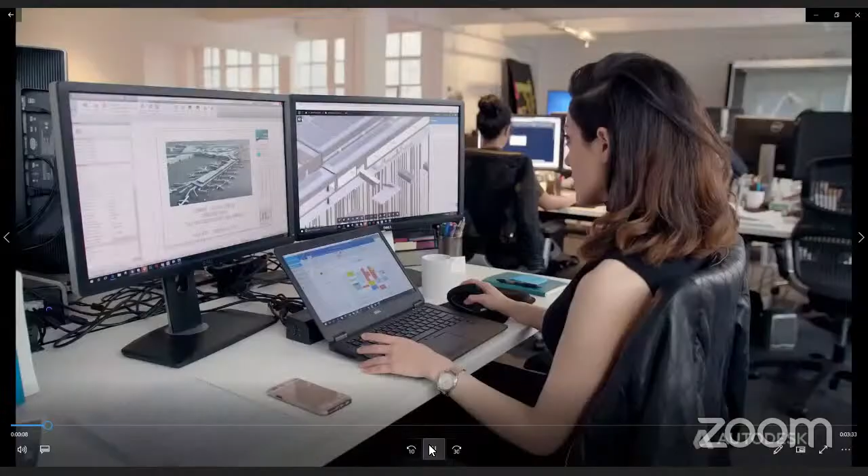Every AEC project begins with an idea and a multidisciplinary team working with a collection of tools to bring that idea to life.

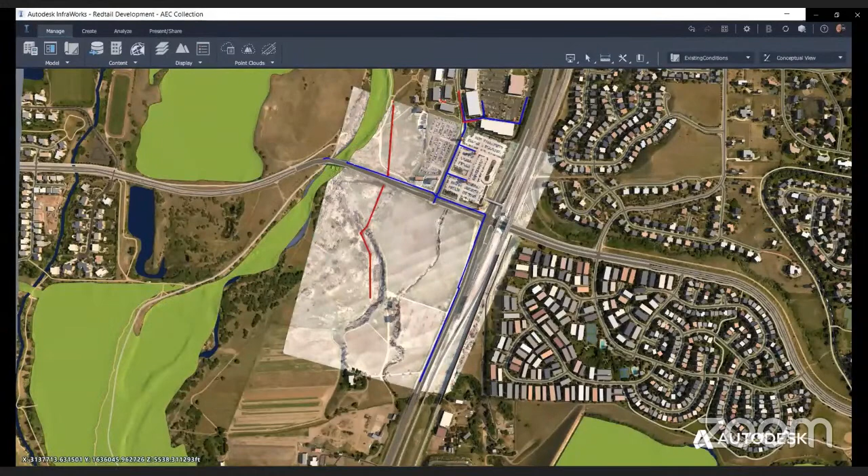Civil engineers start by developing an existing conditions model in InfraWorks. Point cloud data from Recap and GIS content, such as sewer and flood information, are added to enrich the model and enable the conceptual design of road and site layouts in the project's real-world context.

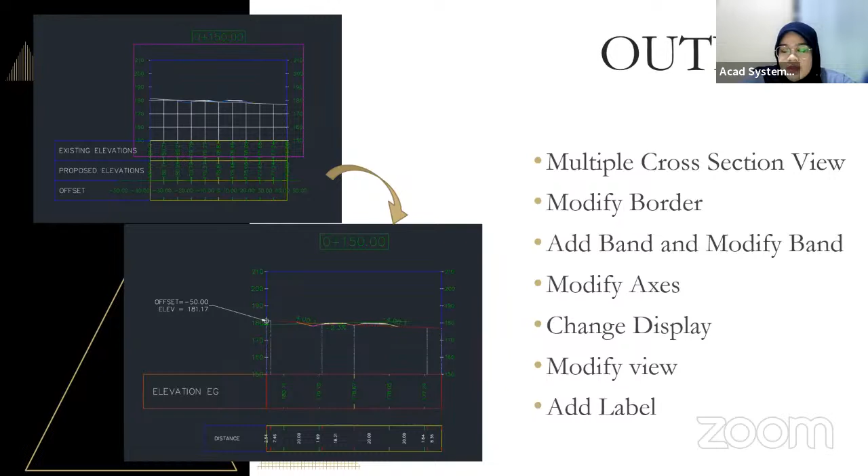This is our output for today's lesson. We will create multiple cross sections, and then from that we will modify the border, add the band, modify the band, modify the axes, change the display colors and display line type, modify the view, and lastly add the label for our cross section.

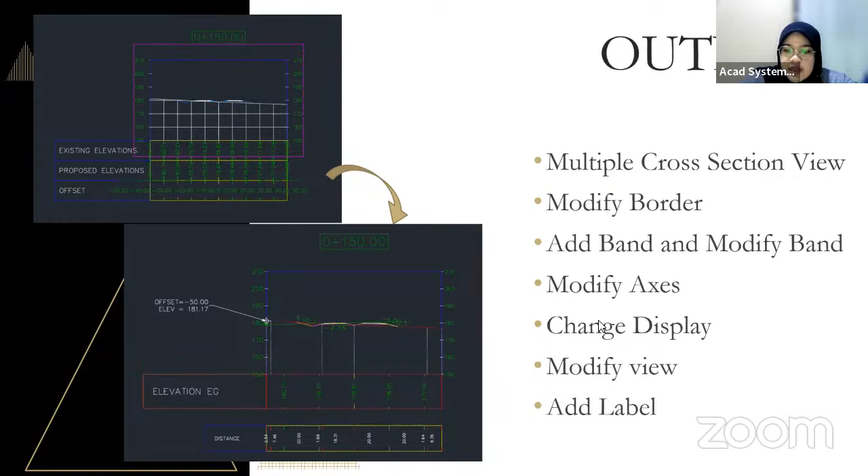As you can see, here is an example of our output today. We're going to change the ordinary setting of the cross section to the one that we want. So I want my cross section to look like this. Let me share my other slide. Here, this is what I want - there will be the EG elevation and also the distance value.

So without wasting any time, let's get to our Civil 3D. I will open my Civil 3D. I already have the corridor work done - the assembly, the profile view, and also the feature, the sample lines.

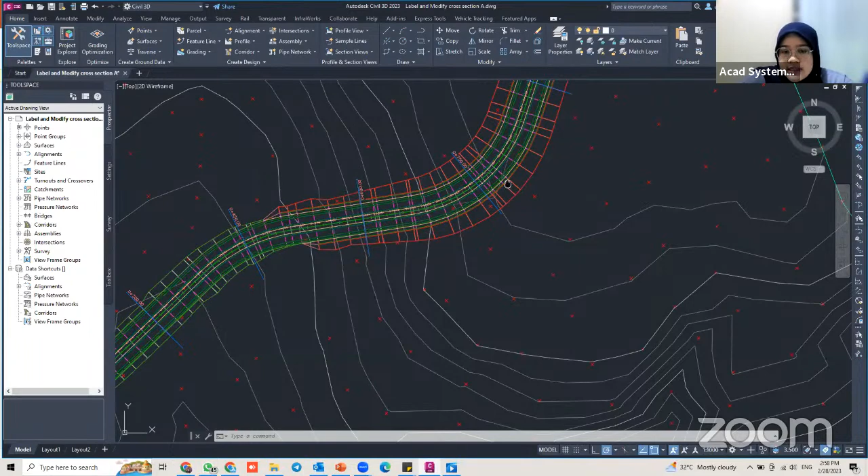So if you want to create a section view, hi, to those just coming in, thank you. If you want to create this section view, you need to have the sample line first. You have to create the sample line first, as I've done here.

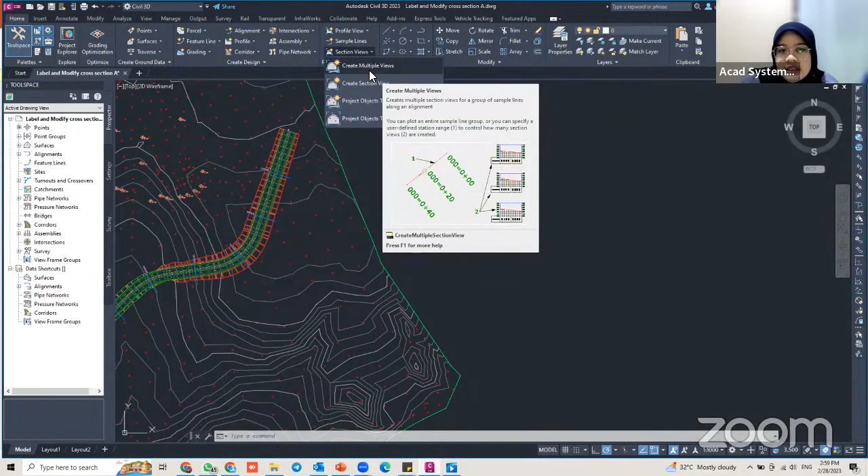To create a section view, you go to this section view option dropdown, and I want to create a multiple view. So just click this one, create multiple view, and from here you can find the setting for my multiple section view. For my case, I only have one alignment here.

So if you have more, you can just select it here. For my case, I just have one, so it's already selected there. And then here you can see this is the section view style.

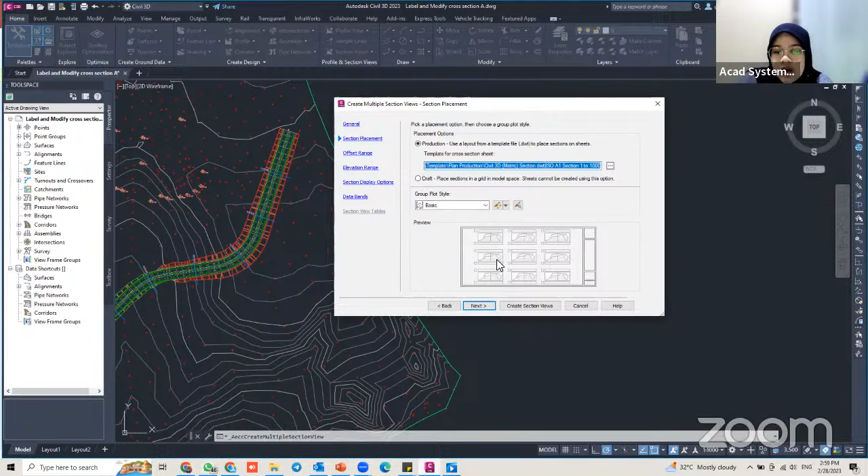This is where you can change the style of your band or of your cross section. Then click next - this is the plotting or placement option of your cross section. Next again, this is the offset range.

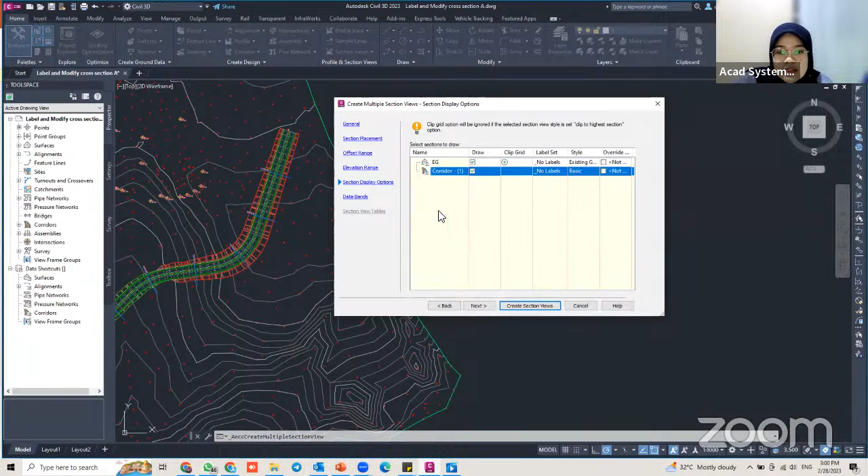Okay, and then this one is the section display option. So I'm gonna leave it right here for a moment. We will do the editing later on. And next is the data band. So this is the data band. What I'm going to change here is just the band set. Never mind, it's okay. Just select whatever band set you want. We will edit or modify it later.

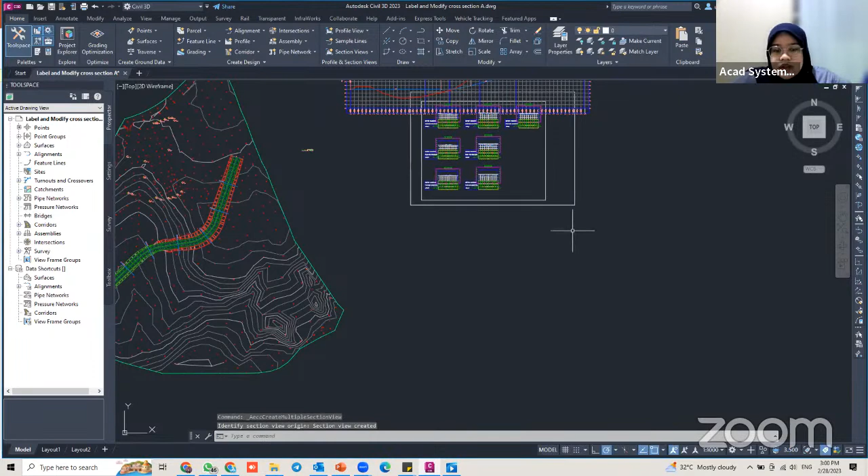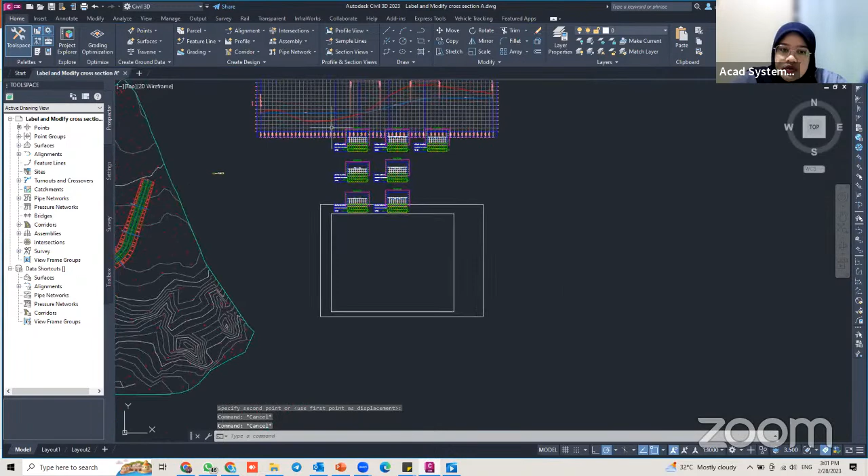Okay, so after you're done with the settings there, just click on create section views. Click on this one. Civil 3D wants us to select the placement of your cross section. So I'm just going to place it around here under the profile view. Okay, never mind, it's okay. We can move it. Just move this one more. Sorry, move this. Okay.

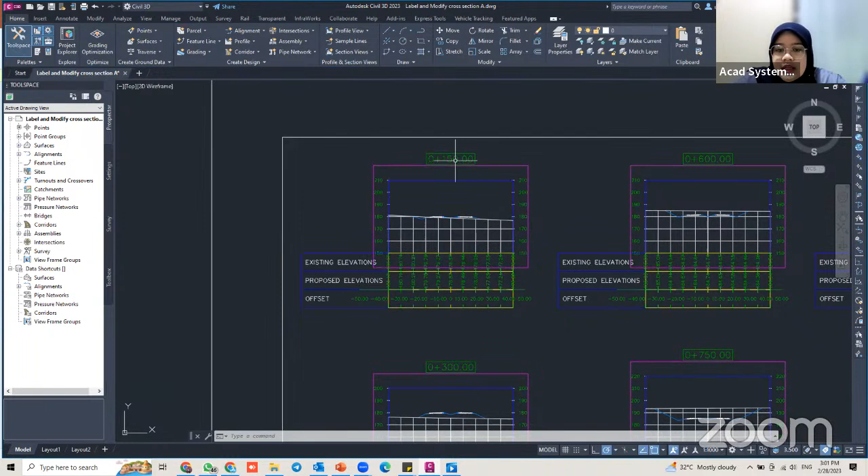Okay, so this is the cross section default setting. It didn't change the sizing, the band size, the box there, and then there is a border. It looks quite messy. So we can modify it to make our cross section easier to read. First of all, I'm going to disable this border. I don't want this purple border here. So just click on any view in here, because it will automatically change everything. Click one of the views and then go to view group properties.

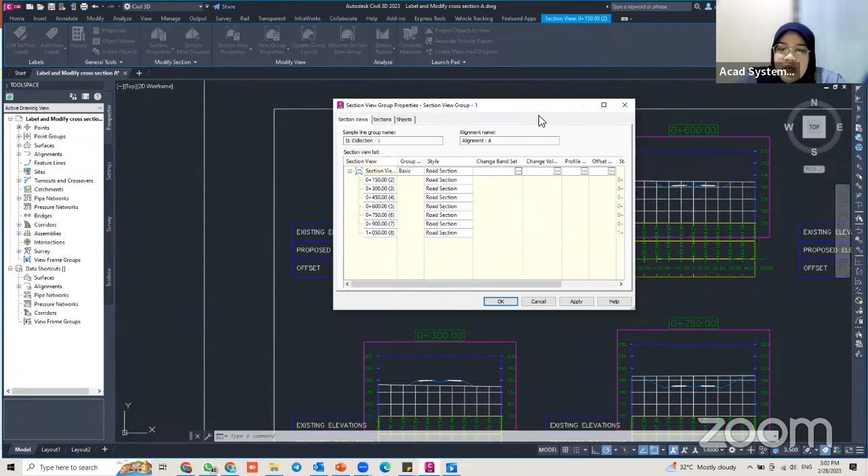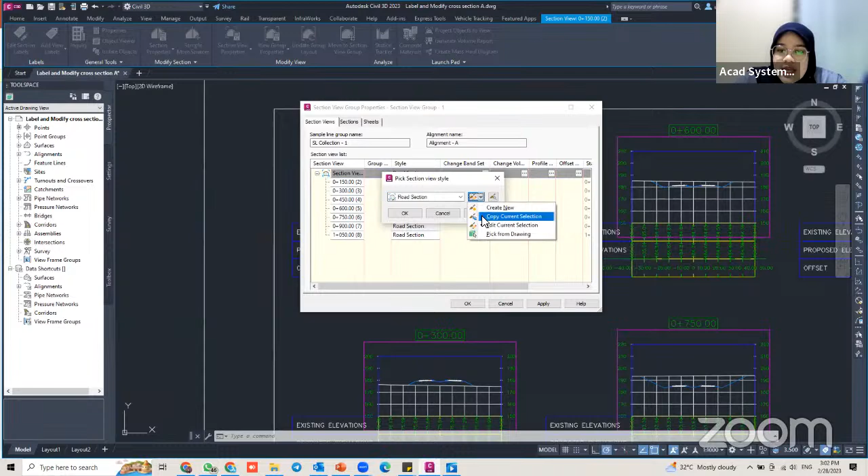Click on this one, and there are three tabs here: section views, sections and sheets. I'm going to the first one to disable the border. Go to section views, and then you can find the styles. Click one of the road sections there, and it will pop up the pick section view style. I'm not going to edit the original road section, so I'm going to click this drop down button and create a copy. Here is the setting for my style. Since I created a copy, it includes the copy name, so I'm going to rename it. This one will be section A, for example.

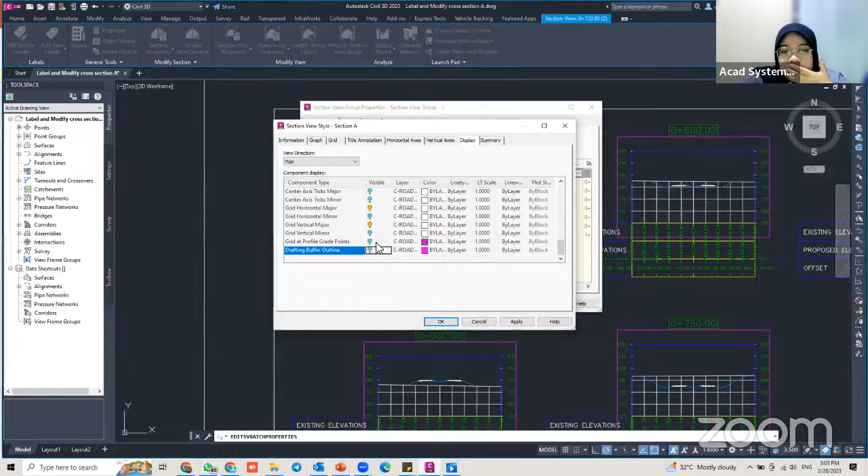And then I go to display. I don't want the border there. So go to the display tab and scroll down until you find the drafting buffer outline. If the bulb is orange, it means it is visible. If you don't want it visible, click on the bulb and make it turn blue. Blue means it's not visible. Same goes for the grid vertical and horizontal major. Disable these three items and click apply and okay. You can see the border is now hidden.

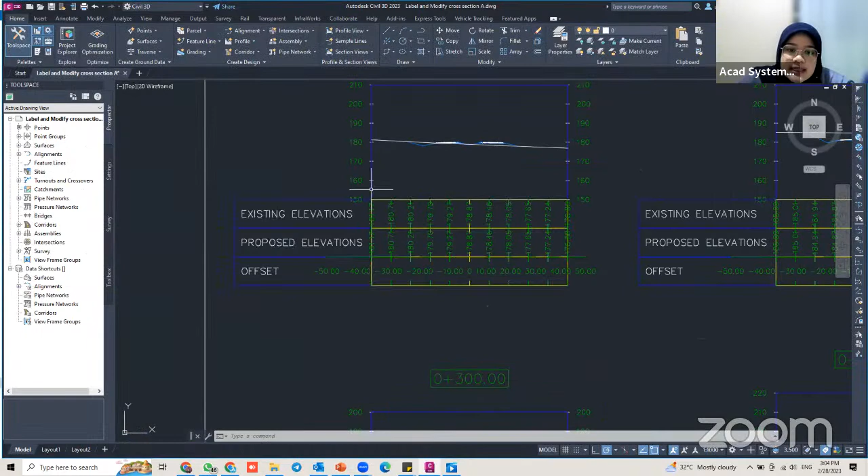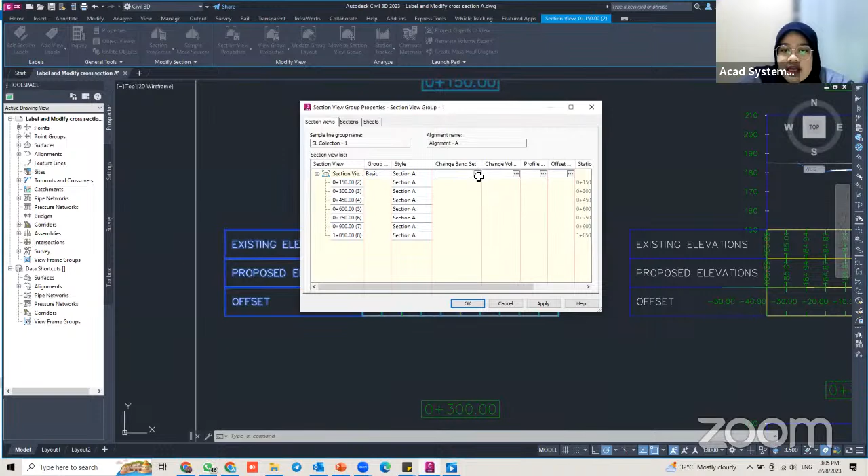Next, I'm going to edit the band. I don't want the proposed elevation and offset elevation. I just want the EG elevation and the distance. To do that, click on any section view and go to view group properties again. For band setting, go to change band set. There is a box with three dots. Click on it and you can see the data included in our cross section: EG elevation, FG elevation, which is the proposed elevation, and also the offset. I don't want these two.

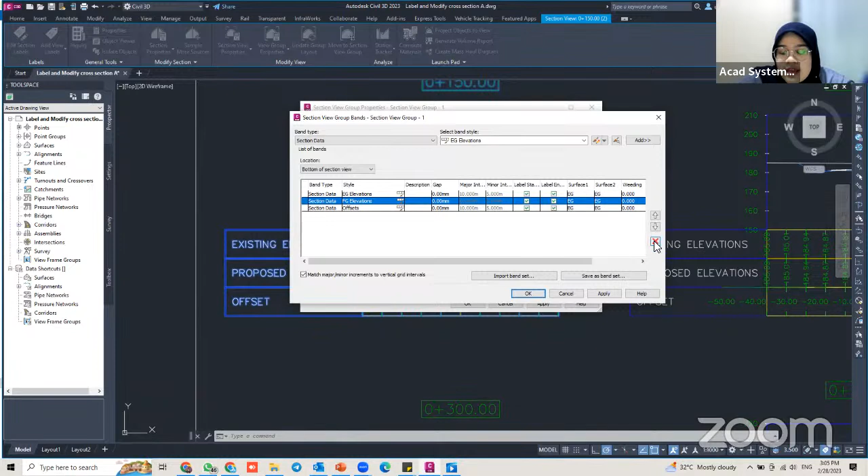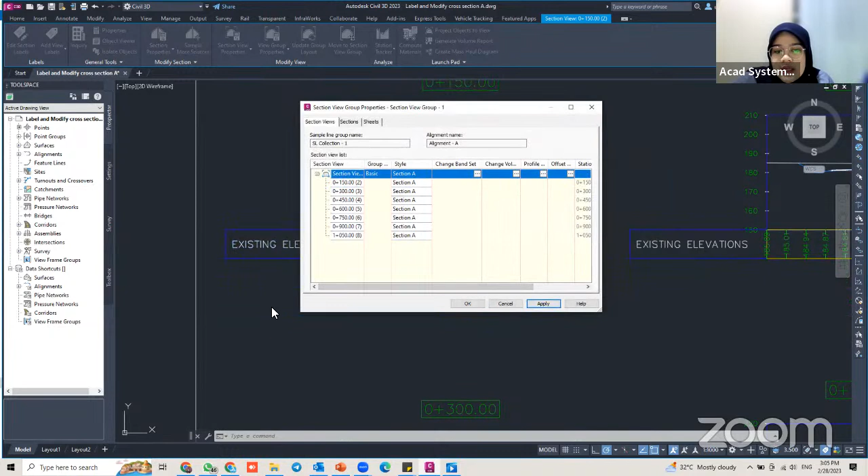So I just click on FG elevation and click the delete button there. Repeat the same step for the offset style. Now the only data is the EG elevation. Click apply, okay, apply. You can see your data band only has the existing elevation. I don't want to close the section view group properties yet, so go back to the band data set.

Right now I'm going to change the name of my band data and also modify the text height and the border. You can see your EG elevation is already in your data. I'm just going to edit it. Click on this one. Below the style and beside the EG elevation, there is an edit button. Double click on that one.

And then this is the style. Okay, so either you want to copy, if you don't want to edit the original style, or you can just edit the current selection. For me, I want to copy current selection and change the name. This one is for elevation EG. I just changed the name like that because I don't want to change the original EG elevation.

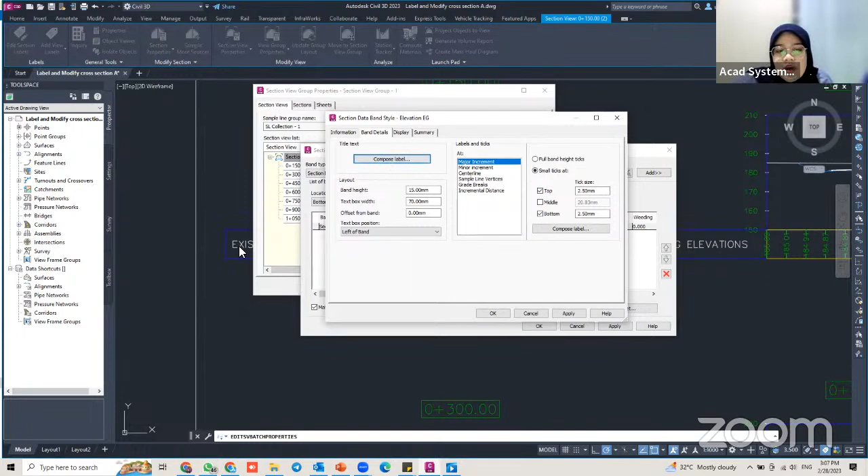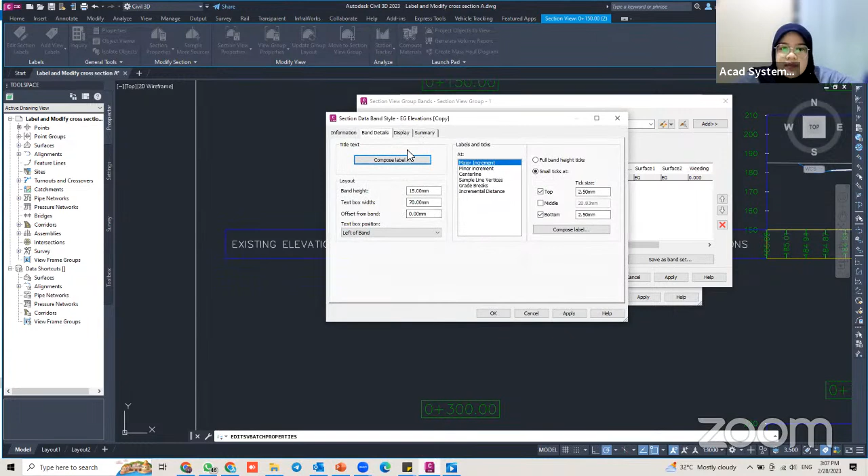Okay, and then I'm going to go to band details. This is where we're going to set our band, okay? So the first is the title text. Okay, apply, change this to have better view. Change this one to EG, copy this one, EG elevation. Okay. One moment. So from here, I want to change the existing elevation.

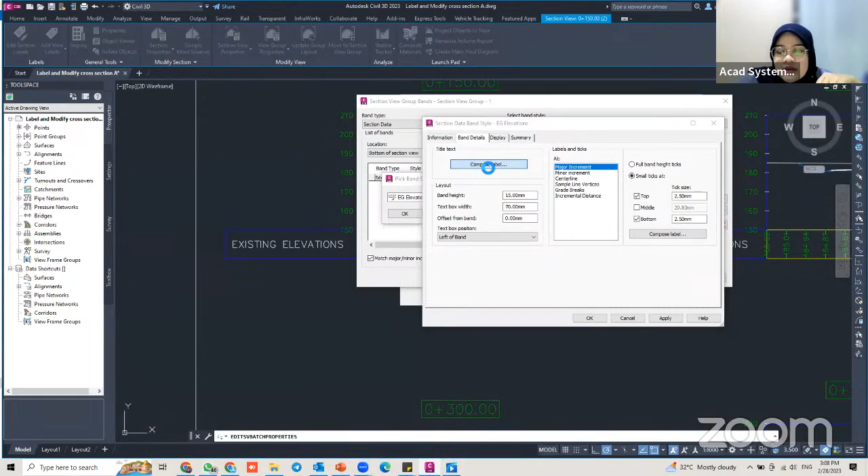I want to change the name. I want to change the size. So to do that, you go to this title text, compose label. Click on this one, and this is where you're setting the title of your band. So first thing first, I'm going to change the name. Go here, you can find there is text, contents. You click on the existing elevation. Beside there is the box with 3 dots. You click on this one.

And then you can find here the text component editor where you edit the title. If you notice, if I highlight it here, this is the existing elevation, the title. So I'm going to change this one to EG elevation. Just directly change that. Okay, and click on OK. If it did not pop up there, you can just view it here. It's a preview for you before you click apply and click OK. If you're satisfied with this setting, just click apply and click OK. This is how intelligent Civil 3D is.

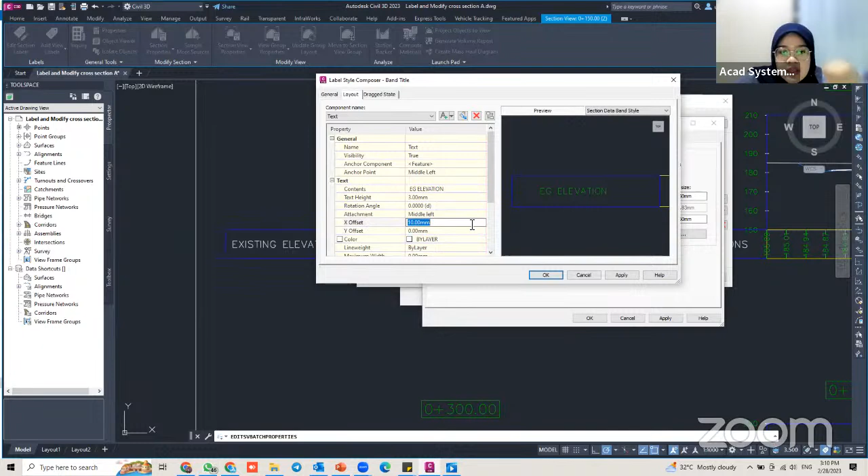Okay. I want to change the text height too. So here, maybe just 3 mm. You will notice the size of the EG elevation title there will decrease. If you want it to be in the center of the box, you just add the value in the X offset here. I'm going to add 5 mm, maybe, or 10. Okay for me, and then that's it. Just click apply, click OK. And if you look now in your drawing, the existing elevation title will be changed to EG elevation.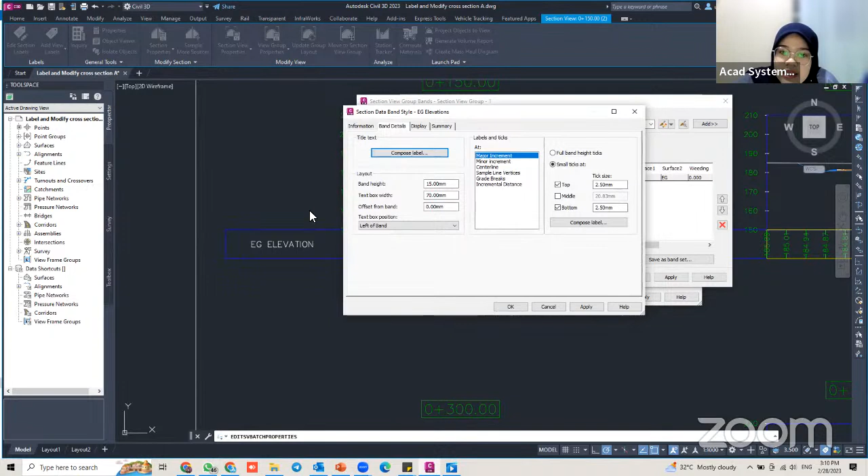Okay, so next, this is the layout of your band. You can find the band height here is 15 mm and the text box width is 70 mm. I'm just going to change the band height a little bit smaller, 10 mm, and the text box I'm okay with 70 mm. Next, you edit the label and text. This is the value of your EG elevation, the data that will be inserted here. So I'm going to select this major increment and click on this compose label.

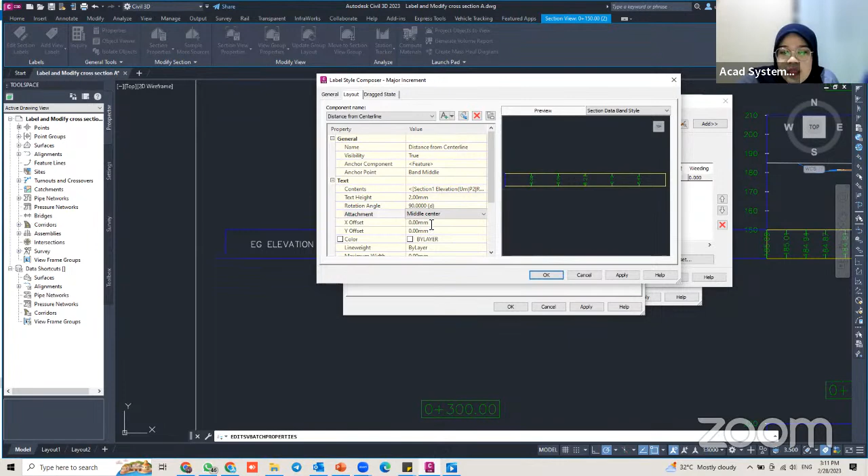Click on this one. This is the setting for your value here in this yellow box. I want to change the text height to 2 mm. The rotation angle is 90 degrees. If you want your value horizontal, just change this one to 0. I don't want it horizontal; I want it vertical. The offset I'm not going to change, and click on apply. Okay.

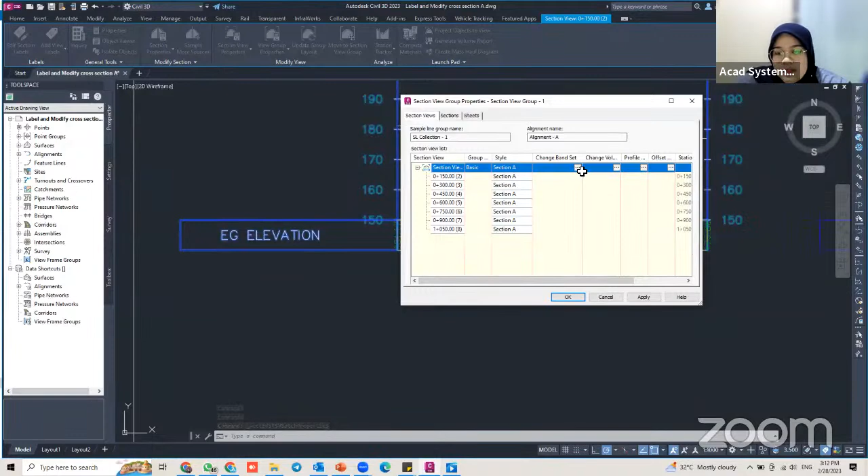So right now, I'll click apply, OK, apply, and OK. This is how the band will be shown. If you look here, this value clashes with the yellow box. To change that, click the view again, go to the view group properties. Sorry, not the change band set. Go to the style, section A, the new style that I just created, and edit it.

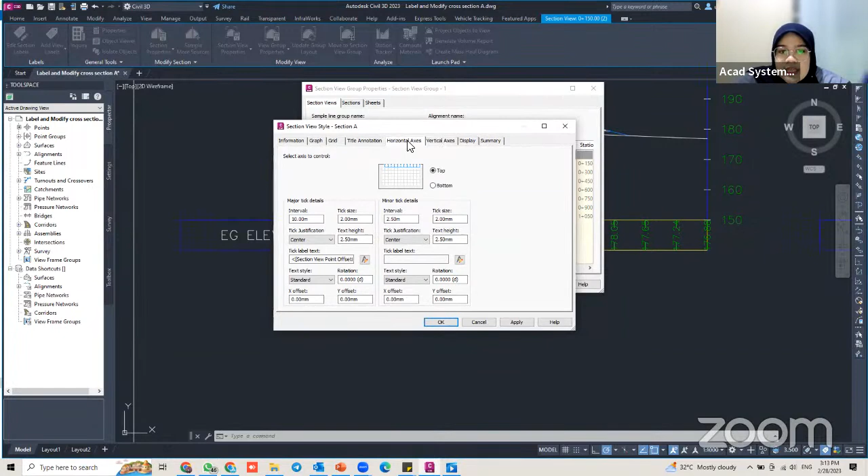And here I'm going to modify the axis. The first is the horizontal axis, and then I'm going to change the vertical axis too. Go to horizontal axis, and here is the major tick detail. The interval for every tick is 10 meters. If you want it higher, you can change it here. For example, I want it 20 meters. And then the text height will be just 2 mm. And repeat the step for the bottom side.

So just now we just changed the top side. So repeat the step for the bottom side. So this one, 20 meter. The text height will be 2 mm. So that is the setting for the horizontal axis.

So next one is for the vertical axis. So click the vertical axis tab. And right now it's currently on the right side. It's okay. Just for the right side, I'm just going to change the text height, and also the X offset here at the bottom there. So X offset currently is 4 mm. I'm just going to change it to 1 mm.

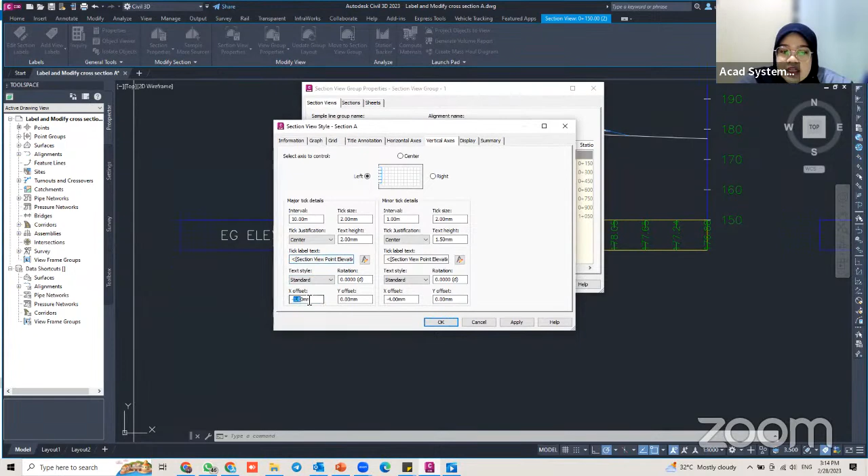Okay, so repeat the step for the left side. Okay, change the text height to 2 mm. And if you find here at the left side, the value of X offset is -4. It's okay. Just follow the value there and change it to -1. Then click on apply, click OK, OK, apply, and OK. So you can find the values there do not clash with the border.

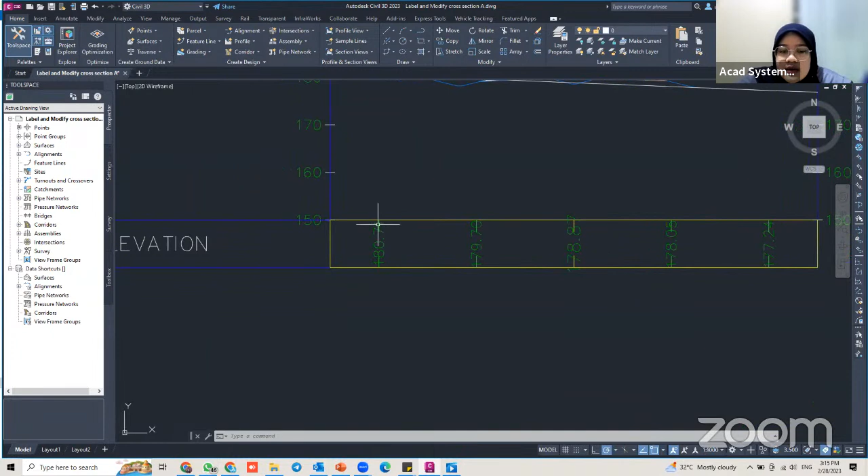And one more problem that I got here is the tick. You can find here the green line; the ticks are actually clashed with the value. So to fix that, just click again on the views, go to the views group properties, go again to the style, edit it. And this part to edit is not the style, the band set. Okay, so go to the style for the band set, double click on it, click on edit.

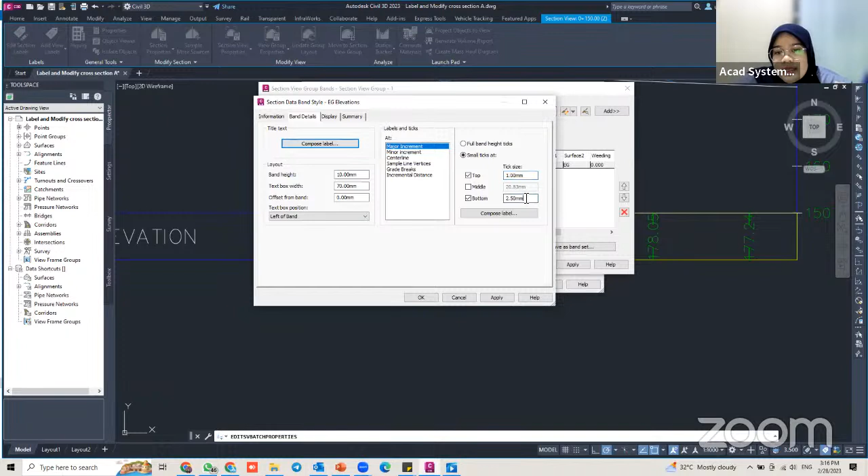So this is the setting for the tick. So currently it's 2.5 mm, so it's big there. So I'm just going to change it to 1. Same goes for the bottom. Okay, just a smaller tick size, 1 mm. Apply, okay, okay, apply, okay, apply, and okay. So the ticks are smaller.

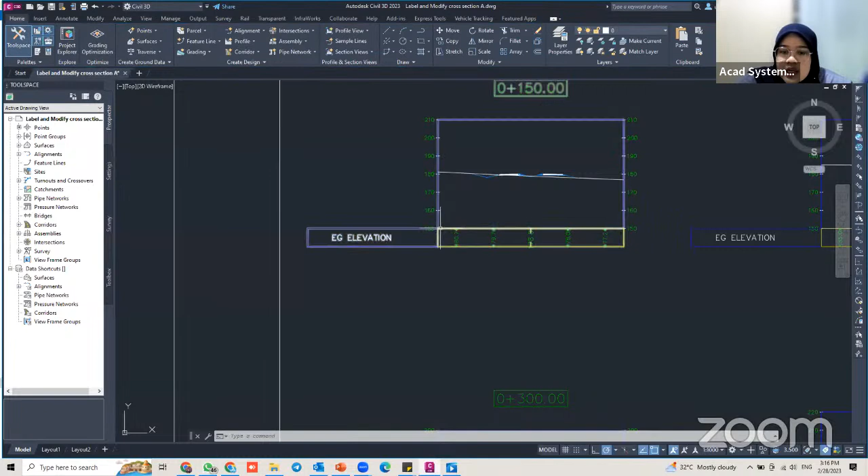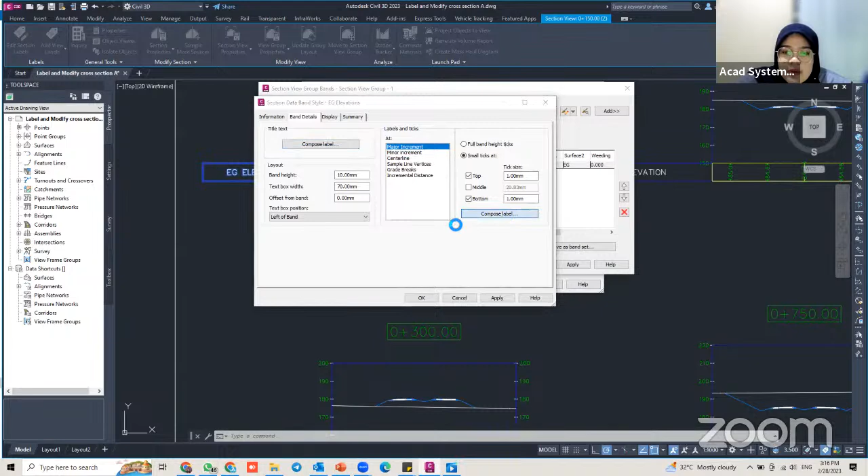Okay. So click again in your view. I want to change the middle tick first, tick 2. Okay. Go to view properties again. Go to band set. Go again to the styles there. Edit it. And this one will be at this compose label. Okay, middle center. Okay, this one is middle center, it's correct. Apply, okay. Then minor increment is okay, center line.

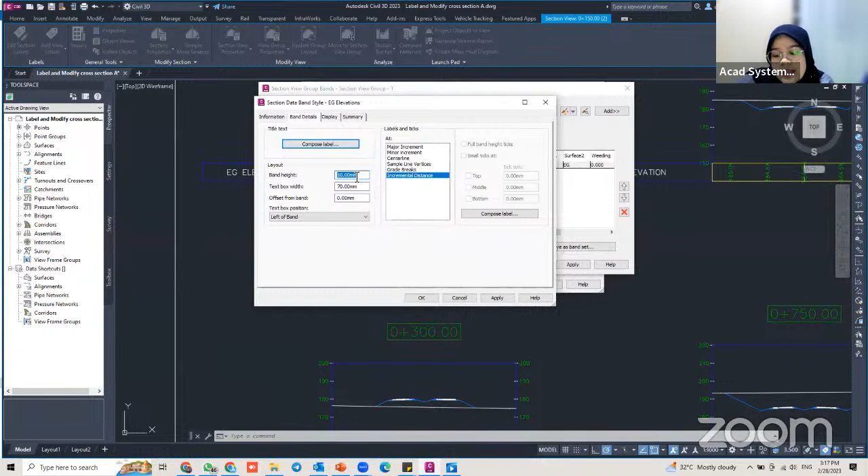Okay, change this text height for the center line to 2 mm. Okay, apply, okay. Sample vertex, okay. Increment distance is also okay. So maybe I change the height. I think the band height here is too small. So I changed it to like 20 mm.

Okay, 20 mm. Click apply. Okay. Okay. Apply. Okay. Apply. And okay. Okay. This one looks much better. It's not clashed or so big that it clashes with the value. Okay.

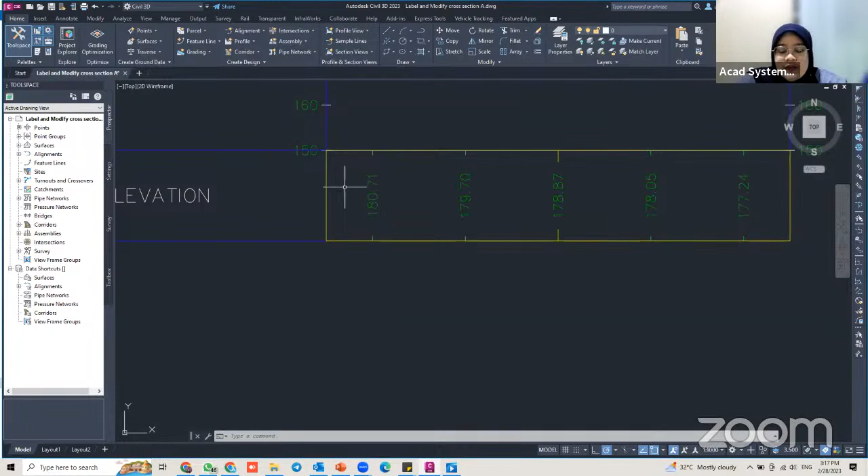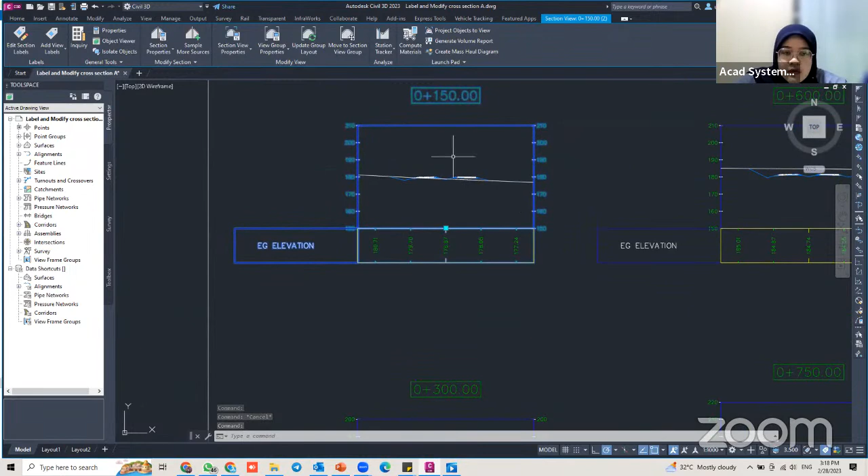So there's one more problem, which is the band is too near to the view here. I want a gap between the band and the views. So to do that, just click again on one of the views, go again to the view group properties. So to edit the band gap, you have to go to the change band set. Click this box with 3 dots, and this is where you add in the gap. Okay, you don't need to go inside the style. Just go out here. You can find this one, gap.

So maybe I just insert the value 2 mm. I just want a little gap, not too big. Okay. Click apply. Okay, apply and okay. So it has a gap there, so it does not clash with the vertical axis here. Okay. So it looks okay to me.

And then I want to add one more band. So for example, you have already done the settings there, the values, the display, and you want to add one more band, any values, any data you want to add in. So just click again on the views, go to views group properties, go to change band set. So here is where you add more data.

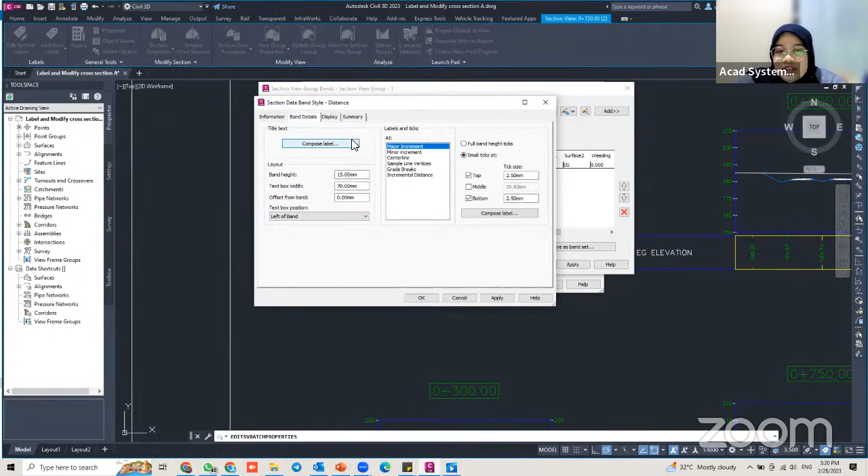Okay. So I just go here, select this section data, and in this select band style, I click the drop down and choose this offset. And before I click on add, I just copy this current selection and rename this one as distance. This one will be the distance. Okay. So the band data details are just going to follow the details, the height, the box, the same as the EG elevation band set just now.

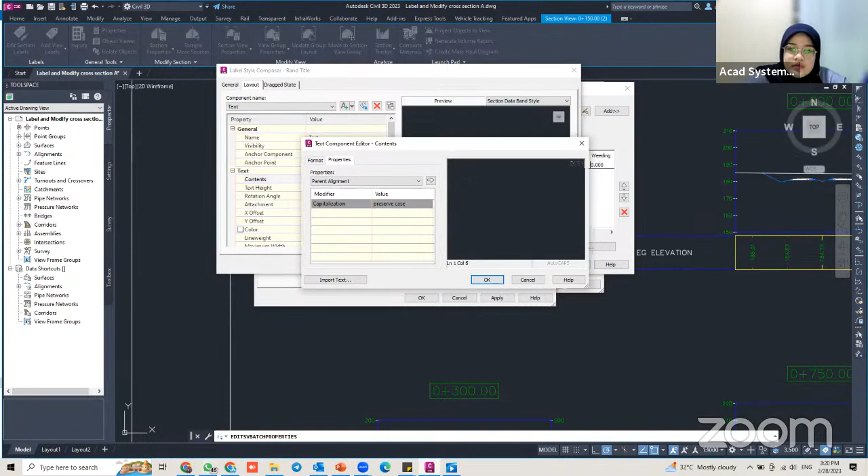Okay. The title text, compose label, and change the text height to 3 mm, same as the EG elevation. And here, the name, the title, I'm just going to change this one to distance. So just repeat the steps I did for the EG elevation.

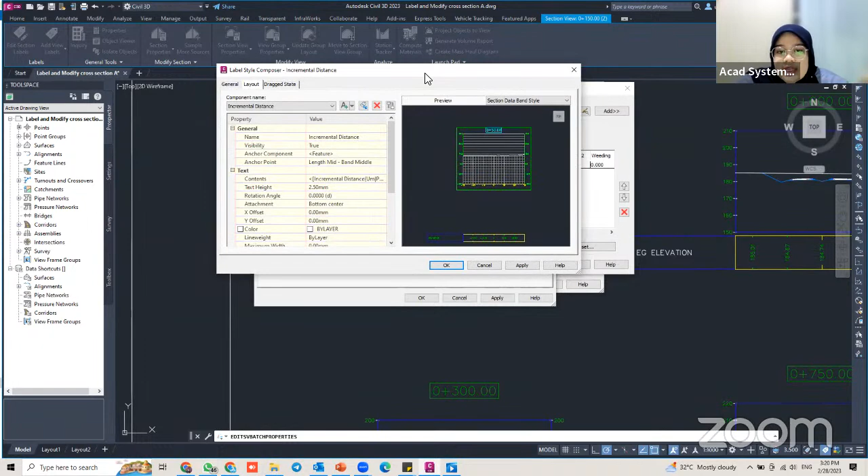And okay, apply, okay. So for the distance, you need to select this incremental distance and compose the label. So you need to add incremental distance. Okay. So the anchor point will be band middle, and the X offset and Y offset will be 0, 0. Attachment will be bottom center. The text height will be 2.5. So I change this one to 2 meter. Okay, that is the setting for component name increment distance.

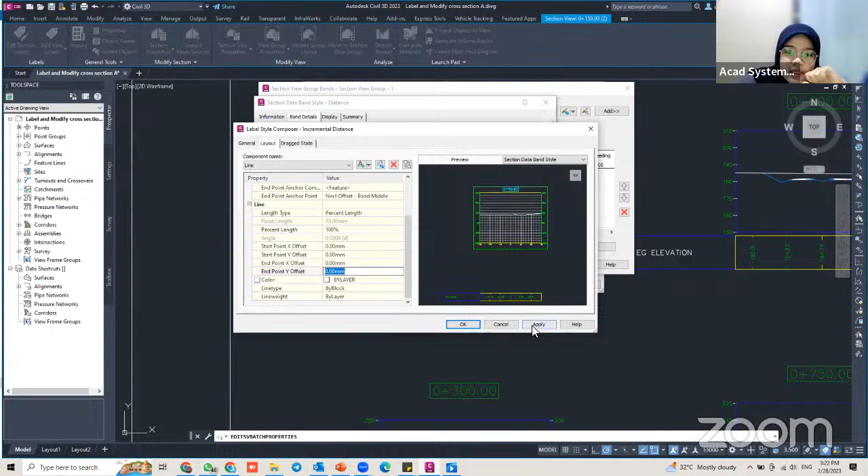So you click this drop down, you can find one more component name, which is the line. So click again, click on the line, and here you do setting for the line. So you can see I'm using end point anchor. So it's true. If it shows true here, which means it will show in your views. Okay. All right, this one is okay. Length type will be the percent length. This one will be 100%. Okay. All right. So I'm okay with this setting. Click on apply. Click on OK.

And then, okay. So click on apply. Okay. Apply. Oh, sorry. I need to do this one. So after you do the setting for the band style and so on, you need to click on add. So if you don't click on add, it will not include in your data. It will not be shown in your views. Okay, apply. Okay, apply. So that is my band or my values for the distance.

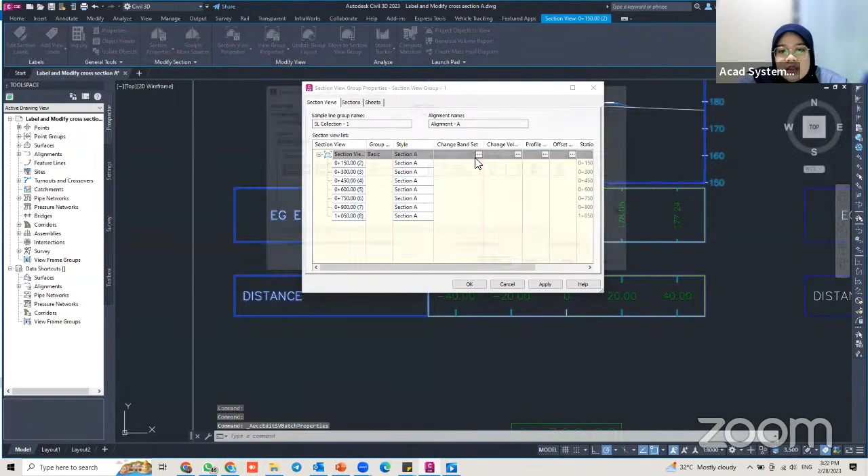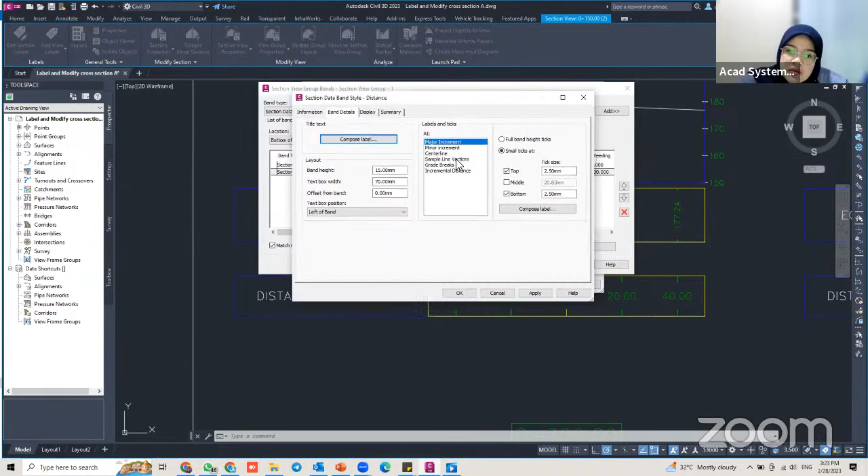So maybe I just change the placement for the distance title band. So easy, just go back to the section, sorry, band data, go to distance, double click on the edit, and compose label, and just add the offset 5 mm. 5 mm is, I think, okay. Okay, apply, okay, apply, okay. So that is how you add more band in your view.

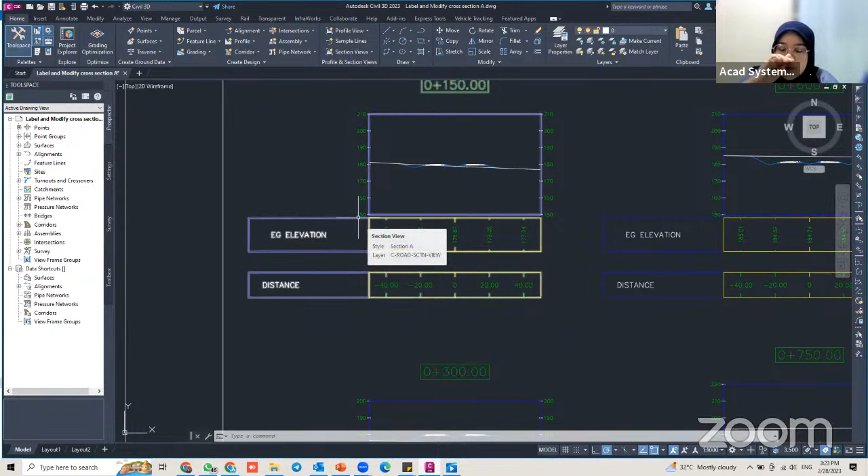So for example, you want to change the band box here, the color. For the EG elevation, you want to change to red color. You just click again on the band, on the views. Go to view group properties. Go to band set, change the band set here, and go to the first style. So for example, I want the EG elevation box to be red color. Just click edit and go to display, and here is where you edit the box or the border.

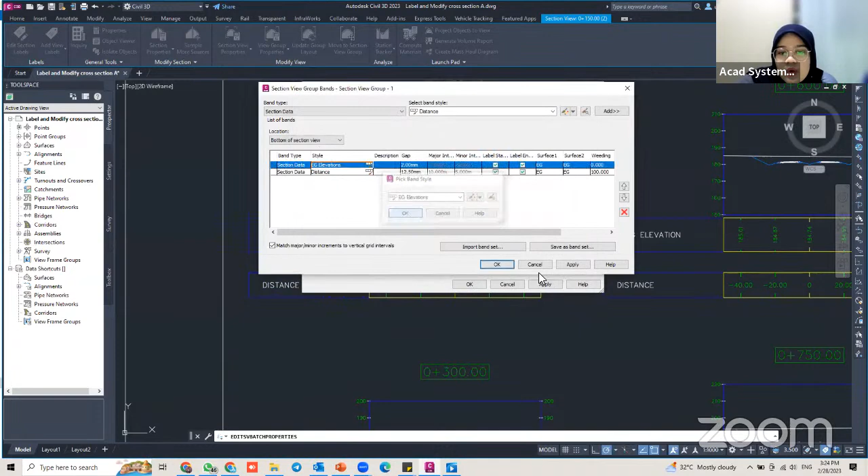So you can find band border. So currently it is the yellow color. So maybe I change to red color. Okay, the title box, if you want to change, you can just directly change here. For example, the title block, I want it to be red color too. Okay, apply, okay, apply, and okay. So right now, my band data for EG elevation box, the borders are in a red color.

Okay. So next one, I'm going to do setting for the views here. For example, I want to show the EG elevations mark there, and I want to change the line. So if I leave my cursor here, this is actually the existing ground line. So I want to change it to a red color.

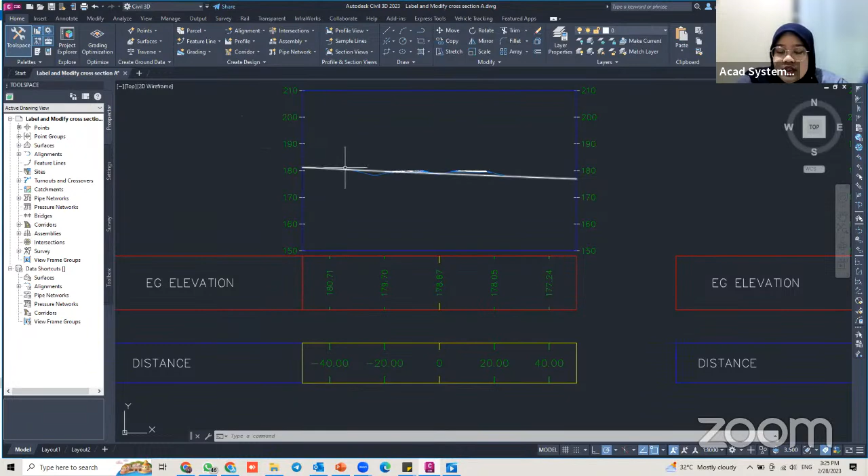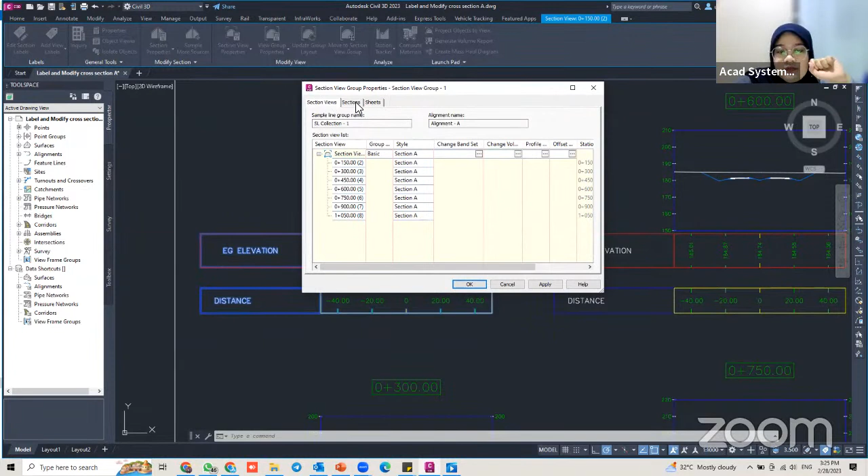So to do that, click on the views again, go to the view group properties. So for the setting for the views, you want to change the color, you want to add the marks or anything for the views, you need to go to section. Just now we went to the section views tab. So to change the views, go to section. And then you can find here is the style, existing ground. So click on the existing ground, click edit.

So these are the settings for our existing ground. So this color right now is white. That's why the line there is white. So maybe I just change to red color. So usually existing ground will be red color. If you want your existing ground to be blue color, green color, it's up to your spec, to your creativity. Okay. So line type, I want it to be dash, maybe dash or hidden, any of these two.

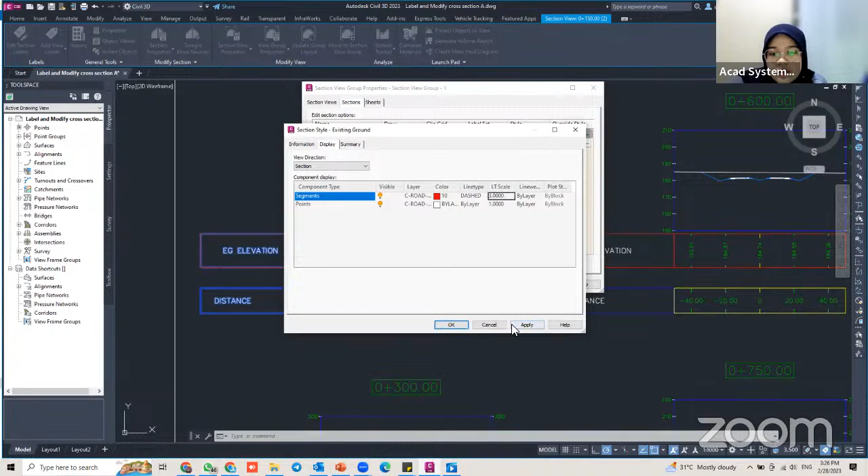And then for the scale, maybe I want it slightly bigger than any line there. So maybe 3. Apply, okay, okay, apply, and okay. So if I zoom into the views, you can find now I can differentiate between my assembly or my corridor, and this one is my existing ground.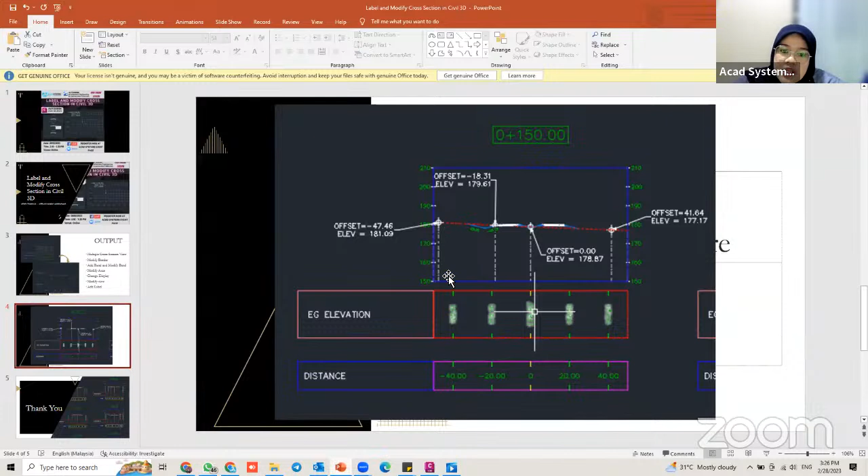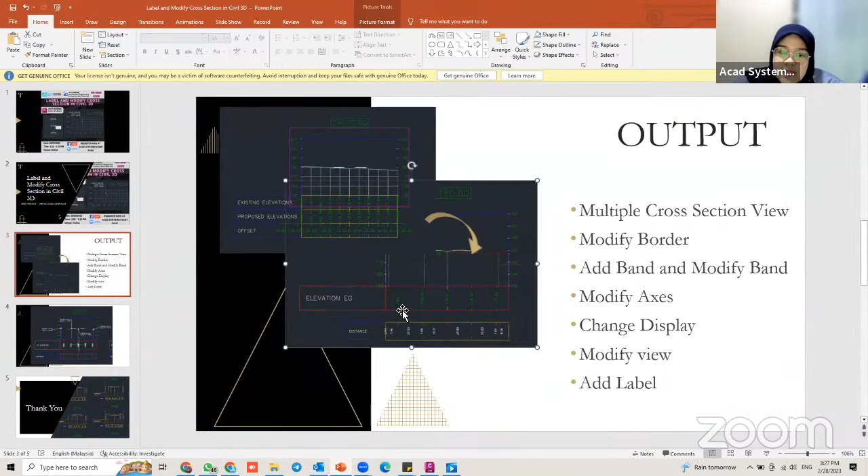Okay, next I want to add this mark here, which will be the elevation crossing the elevation data there. Okay, so to do that, I'm going to go back to Civil 3D. So click again on the views, go to section view group properties. So beside the existing ground, you can find there is label set. So click on this one, click on label set. Okay.

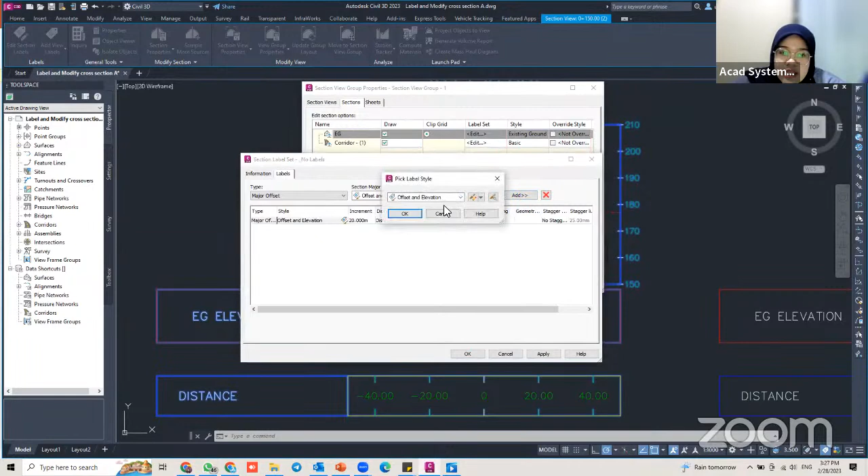So click on add, just add anything and edit this style. Edit this one. You can find this is what the label will be shown. So I don't want the label, I just want the line. So go to layout, and maybe not this one. Change this one to standard.

It will be... okay. A moment. Okay, for this label set, I forgot to change this one to EG section labels. Okay, this one is the correct set to use. Okay, click on edit again. So go here, click on edit.

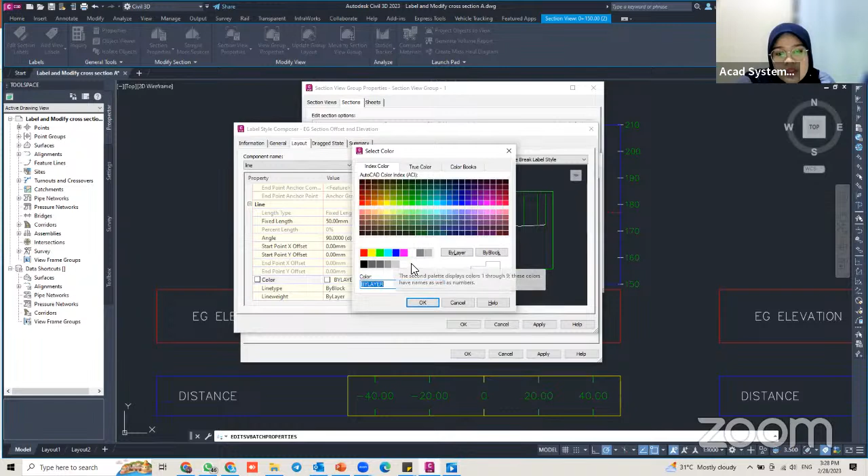Okay, so right now in the component name, there are three: offset and elevation. So I'm just going to delete the elevation and offset, just leave the line there, and change the colors and the line type to what I want. So for example, the color I want it to be gray, and the line type I change to phantom, for example. And the fixed length will be 30 mm.

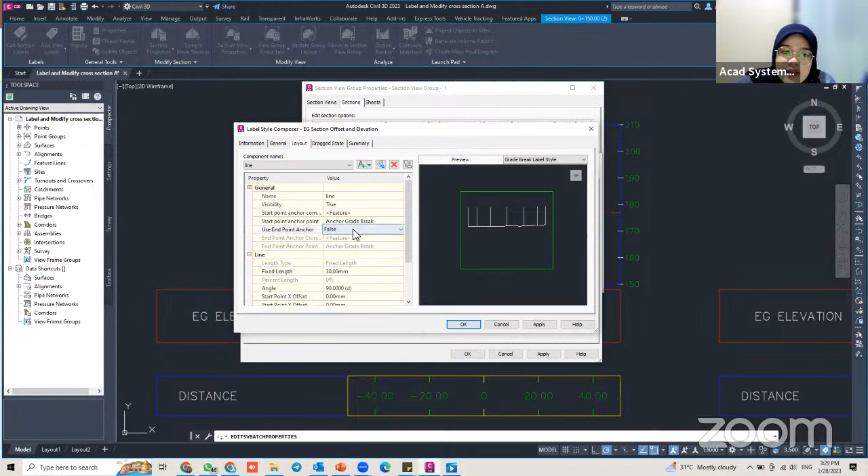Then change this use endpoint anchor. Now it's false, so change this one to true and change the endpoint anchor point to the break extension. So it will extend your EG elevation to the band. Okay. All right. So apply.

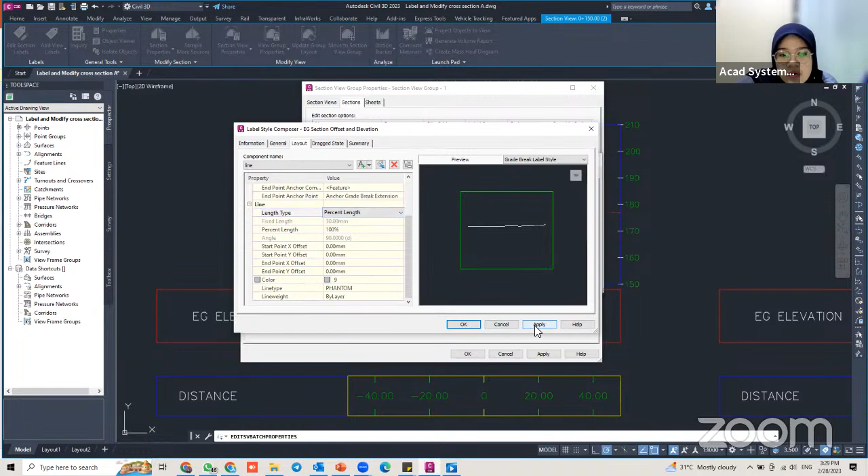So next, I'm going to add a label for every mark there. So it's simple, just click on the views. You can find here is add label. Sorry. So add view label. So click on this add views label. So you can find that there is the offset elevation.

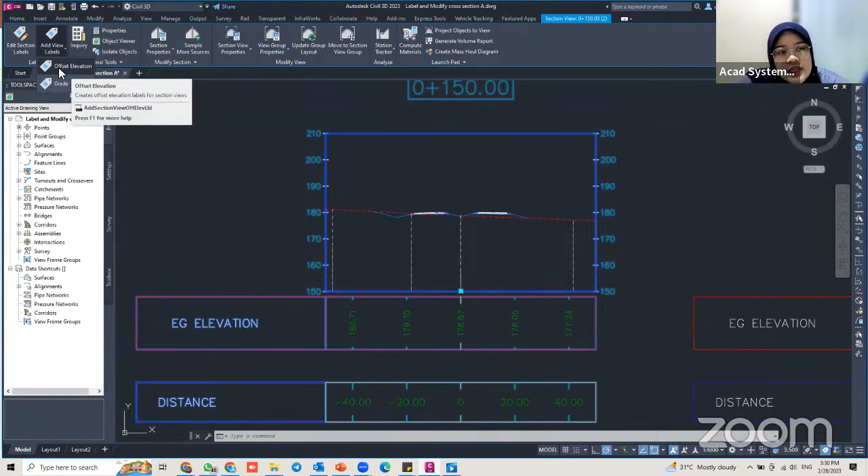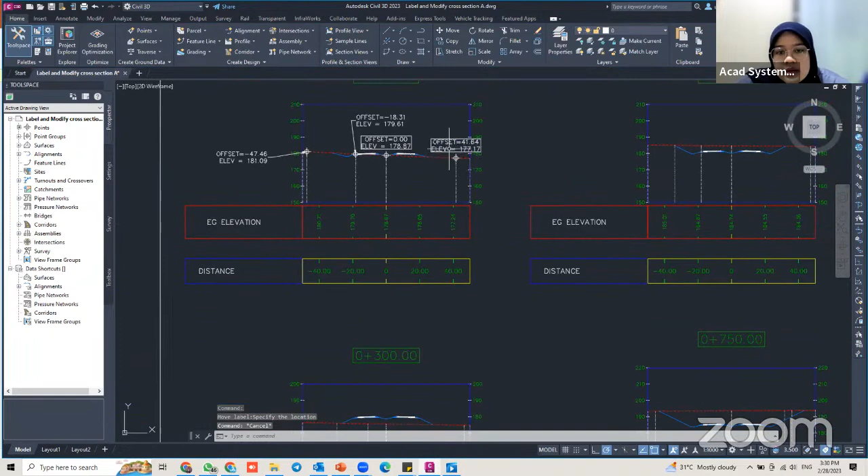Just click on that one and place it on the end point of your elevation mark. Okay, like that. And if you want to drag it out, just simply use the grip there. Drag it out, drag it upper. Okay. So this one just depends on where you want to place your details.

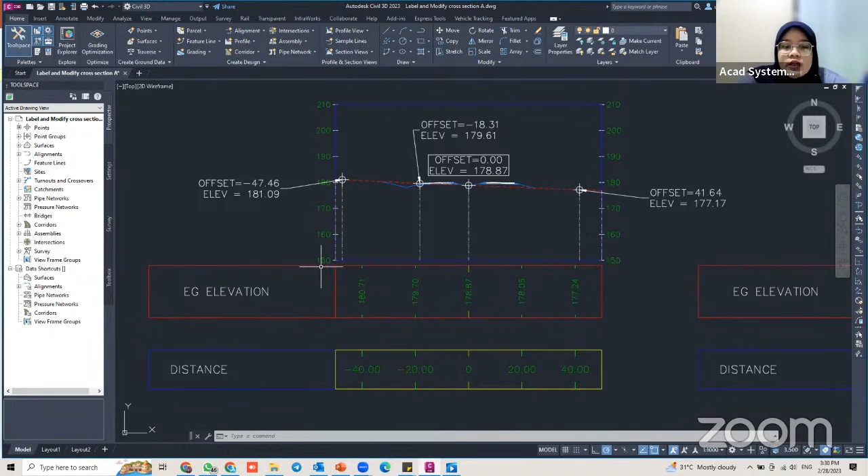Okay. So that's it. That is how you modify cross sections and labels in your Civil 3D. You might want to explore more. You can use my method just now to implement it in your spec. So you can change the title according to your specifications or your requirement. Also, you can change the tick increment. Anything else, you can explore it by yourself.

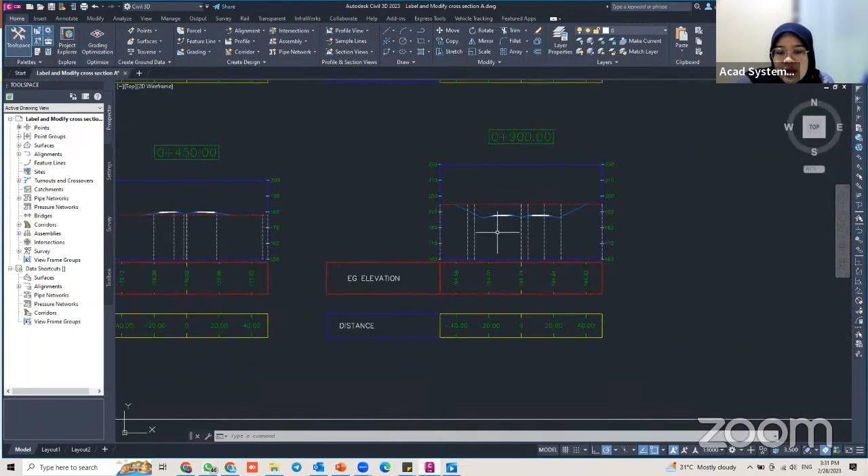Okay. This is a simple method I showed you of how to add the label and modify it in Civil 3D. And if you look, the other cross-section views also change according to my spec. Automatically it will change. That is how intelligent Civil 3D is. Right, that is how you do the label and modify cross-sections in Civil 3D.